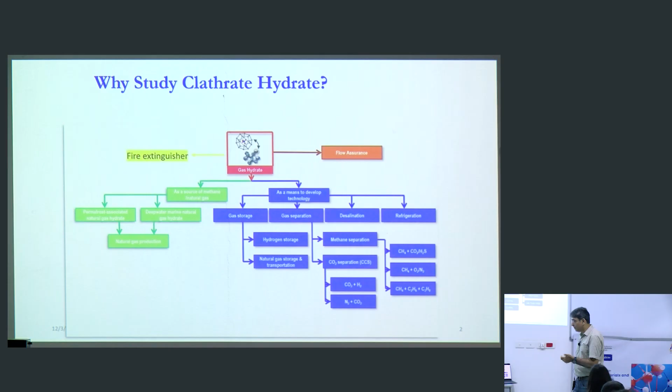Now, why does hydrate form? Why does ice form? When we have water molecules at room temperature, they have some thermal fluctuation. Each water molecule has thermal fluctuation. They try to form hydrogen bonding, but because of this fluctuation, the bonding does not form—one molecule is fluctuating here, another there, and they are not able to find the optimum distance where the attraction is large enough to form this bond. When does that happen? If I reduce the temperature, the thermal fluctuation comes down, and they find enough distance to start forming this bond—this happens roughly at 4 degrees centigrade. Then around 0 degrees, you see water crystallize into ice. This is what we know of water crystallizing into ice.

These hydrogen bonds form, and then we get a beautiful crystal coming out of it, and we see there is a phase separation. Solid gets separated out from liquid water, which will ultimately all get converted into solid ice if the temperature remains below 0. If the temperature is somewhere above 0, then an equilibrium will be attained, and all that we know about.

What happens when a gas is present there? Instead of reducing the temperature to minimize thermal fluctuation, if I pressurize a molecule with a gas like methane or carbon dioxide, there is not enough space for this molecule to fluctuate. So these thermal fluctuations are minimized, and when this gets minimized, this crystalline structure might form with the same hydrogen bonding even before 0, or at higher temperature than 0 degree centigrade.

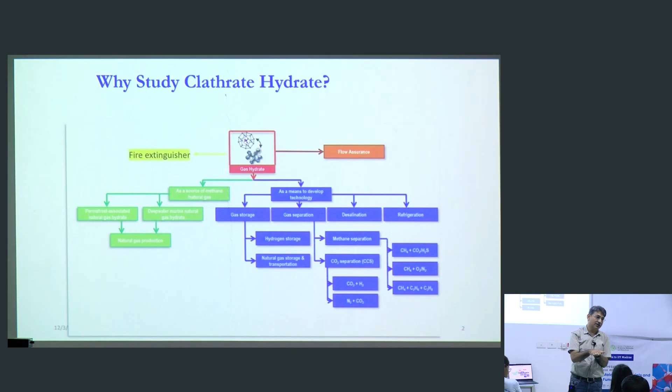So now you see, since this system had water and it had a gas, it started crystallizing out even at 5 degrees. It may even crystallize out at 10 degrees, and if it crystallizes out, then the flow gets obstructed.

Down that end, we have very high pressure. Up over here, we have low pressure. So we expect what the businesses would expect: maximum amount of oil should come out from this pipeline, that is how they will make more money. But if that pipeline starts shrinking, why will it shrink? Because the crystals are forming on the walls of the pipeline.

The metal wall is going to be slightly cooler compared to the liquid which is coming out. So where will it crystallize? It will crystallize at the temperature of the wall where it is slightly cooler, where the thermal fluctuation is minimum. So it will nucleate there, crystallize out, and slowly it will grow. If this is the pipeline, and it's growing, it will become like this. So your pipelines are becoming narrower and narrower, and then ultimately at some location it gets completely blocked, and it becomes a challenge.

What is the challenge it will become? I will show you if we have a marker here. Please understand, this is not going to be a straight pipeline. Let's say somewhere over here, this is the pool of oil we are talking about, and let's say this is the pipeline. I have drawn it poorly, but it's a nice pipeline, not larger, smaller diameter and all.

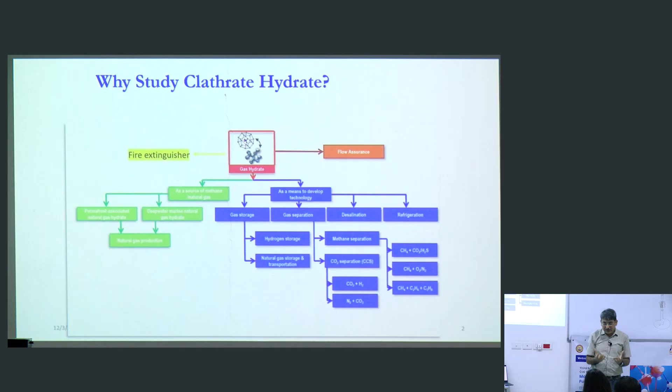You are looking into how the water molecules are interacting, how the gases are interacting with that, how the crystals will form, what kind of additives will enhance the rate of hydrate growth. For example, in gas separation, I want water to get converted into hydrate very fast, meaning I need an additive which enhances the rate of hydrate growth. Whereas in flow assurance, I need an additive which will inhibit the rate of hydrate growth. So two different applications need two different kinds of research, but the fundamentals remain the same: how hydrates grow, and what are the properties of hydrates. With this background, let me now go a little deep.

This was a broad understanding of why we do this. Once we know why we do this, then we'll go into how we do this. Let's take an example, but let's not go into this one yet. I'll come back to it. These slides will be there again. Don't worry, I'll go to the hydrate part first.

If I have to go for CO2 capture application, I did tell you about gas separation, giving you an example of a mixture of CO2 and nitrogen. When we talk about net zero, we talk about CO2 capture, utilization, sequestration. The first step is CO2 capture. What exactly is this? Technically, CO2 capture means separating carbon dioxide from other gases. Why do I need to separate it? I will discuss that later. It's there, I don't have much time, but I will discuss it quickly.

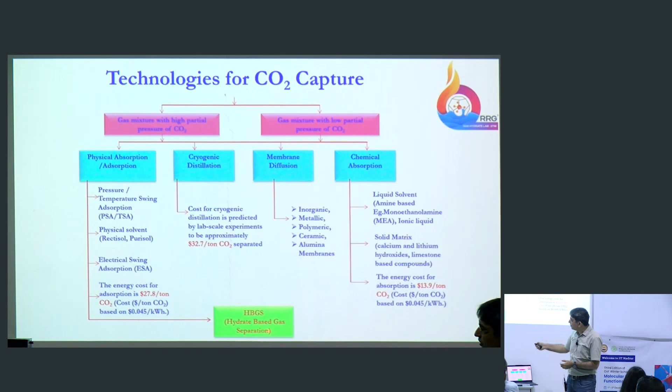The point I am trying to make is that depending upon the requirement, we may go for different kinds of CO2 capture processes. One could be a physical absorption process, one could be cryogenic distillation, could be membrane diffusion, could be chemical absorption. And if we talk about physical absorption processes, hydrate based gas separation process comes under that. I will try to give you a small understanding about what exactly this is all about.

These are hydrates. What are hydrates? As I was telling you, they're very similar to ice crystals. If you have ice crystals in one hand and a hydrate crystal in the other, physically there is no difference at all. You will not be able to separate or identify hydrate from ice. They look exactly the same because it's the same hydrogen bonded water molecule. And do you think gases are visible? Gases are not visible. So even if inside the cage there is a guest molecule like methane or carbon dioxide, you will not be able to see the difference. How would you determine which of these two are hydrates?

When you bring it closer to your ears, one of the hands will keep making a popping sound, because gas hydrates are not stable at room temperature and atmospheric pressure. These hydrates were synthesized at high pressure and low temperature. So once you bring the crystal out and hold it closer to your ears, you will see it continuously dissociates. You'll hear pop, pop sounds as methane or CO2 gas keeps coming out. If you put it in water, you will see all the gas come out as bubbles. This is how you differentiate them, but physically there is no difference unless you do a spectroscopic analysis. That's where the difference shows up, and we'll talk about that.

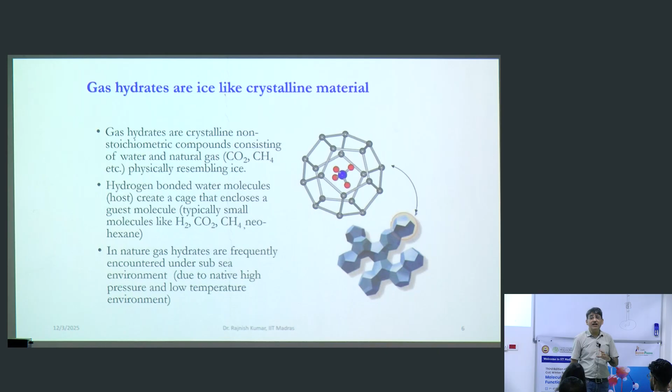We will talk about this in little detail, but gas hydrates are frequently encountered under the seabed, and they can also be synthesized in the lab. I can synthesize hydrates in the lab of multiple different structures. There are many structures, but we typically don't talk about all of them. We talk about a few structures which are available in nature, but in lab you can create many different kinds of structures.

But what exactly is this structure of hydrate all about, and why are we going to study this? Why as an engineer should I be bothered about it? Because as an engineer, I am supposed to find a solution to a problem which exists. The problem we talked about is a gas mixture coming out from the stack of a coal-fired power plant. Plenty of CO2, nitrogen, oxygen, SOx and NOx comes out from there and goes to the atmosphere. I don't want that carbon dioxide to go to the atmosphere. Why? We will talk about it later.

At this moment, we don't want this CO2 to go into the atmosphere. So what are we trying to propose? We are trying to propose that we will capture the CO2 apart from the other gases in this gas mixture. Nitrogen and oxygen we will release to the atmosphere because that does not bother us. The CO2 is bothering us, so we will capture it, we will store it, and we will see what we have to do with that. So this is one of the applications talked about here.

So what I am saying is, if I have a mixture of CO2 and hydrogen, or CO2 and nitrogen, I pass it into a reactor which is only having water, nothing else. If I have to otherwise capture CO2, I will have to have a zeolite, a metal organic framework, a covalent organic framework, some amine, some alcohol — something I will have to have. But all of these, please understand, has to be synthesized. Humans will have to synthesize it. In this particular case, I am saying we don't need to synthesize anything. We'll just use water.

I am coming there, that is where I will go. Don't worry. This is where I am different from others - I don't go to the depth first, I go to the shallow part and then we will go to the depth. I want you to first understand the application, remaining things we will talk about.

You see, too many calls nowadays. Okay, so very important point, and I want all of you to ask questions, because this kind of workshop or school is important to interact. I am not here to present and be done with that. Even if I will not finish everything, I will not mind, but whatever I finish, you should understand - that is the point I am trying to make. Very important point, but we will come to that. All of this is done, let us move to the next slide.

In this particular case, I just want you to understand this - this is a physical process. It basically means if I have a lesser amount of CO2 in my mixture, and if I have to get 100% CO2 or 99% CO2, I will have to do this step multiple times. It is not a chemical process. If it were a chemical process, what would happen? CO2 will react, will form something else, so there will be no CO2 left, I will get only pure nitrogen. I had warned you guys that this is a physical process, so it means I cannot talk about 100% purity.

Why do we do this? Let me explain - that is more important. We do this mainly because if I am using a chemical process, I will have to bring another chemical which will react with CO2 and form something. So we are talking about a reaction. What is the reaction we are talking about? Let us say carbon dioxide is A.

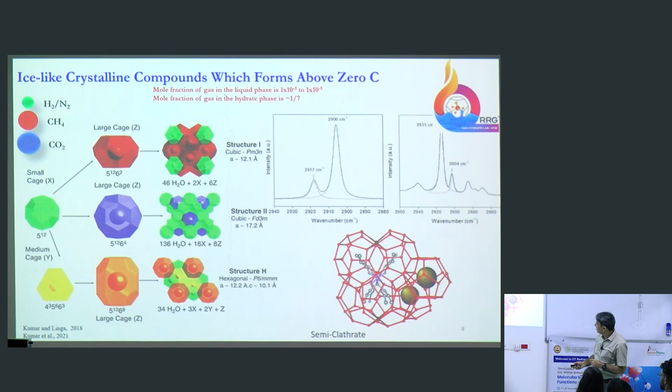So if I am somewhere in between, when I am forming hydrate, primarily CO2 will form the hydrate because it has lesser thermal fluctuation. It's all about the net energy, where it has to just go and sit there. If you have lot of energy, you will resist going in there, or even if you go in, you will come out. But if you have lesser energy, you will go in and not have enough energy to come out.

This is what we are trying to do. I have identified the right temperature and pressure conditions where I know CO2 will go into the cage, but nitrogen, even if it goes, it will come out. Okay, this is one factor, there are more. This is not that simple, so we will talk about it in the next slide.

What is shown here is that there are different kinds of hydrates which form, and it depends on the size of the guest molecule. For example, if I have one molecule of a certain size, and I know the hydrogen bond length stays the same at a certain temperature, how many molecules will be needed to wrap around it? Let's say 6 molecules would be needed. Now assume this molecule is a different size - do you think only 6 molecules will wrap around it? No, it basically means the cage size will depend on the size of the guest molecule.

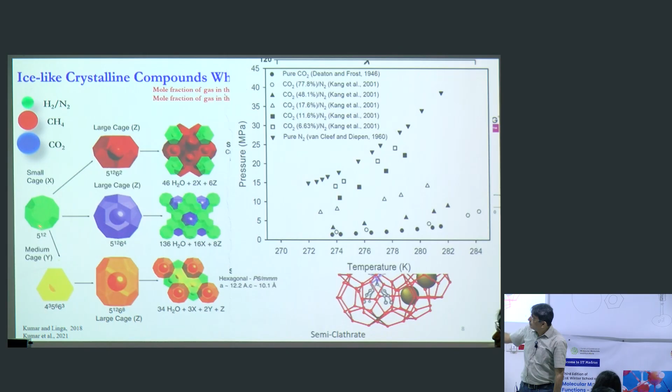The other details: in this unit cell, there are 46 water molecules, and 2x and 6z basically tells you there are 6 large cages and 2 small cages. So 46 water molecules form 6 large cages and 2 small cages - look at the ratio, 3 is to 1. Now if you look into structure 2, there are 136 water molecules with 16 small and 8 large cages. The ratio is 2 is to 1, small to large.

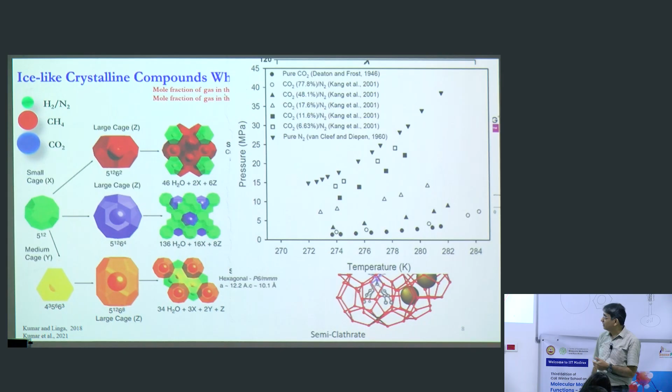So there are lot of details - not only temperature and pressure condition determine what structure forms, but also what kind of size and shape determines what structure forms. It is easier for a single guest, but with multiple guests it is a complex process - we will talk about it maybe in the next slide. Is that clear? Whatever little I was able to explain, I have explained, but if you want more details you can ask me and I will handle it.

Now if you look into having a mixture of carbon dioxide and nitrogen, CO2 is something like this compared to nitrogen, which is this small. Now I am forming a hydrate of CO2 and nitrogen. CO2 being larger in size will have to fit at least in the large cages of structure 1 hydrate, so typically methane and CO2 forms a structure 1 hydrate. It basically means the size of the guest is such that it can fit into the large cage of structure 1, and possibly it also fits into the small cages of structure 1.

When we form such hydrates and do spectroscopic analysis, we have seen, and this has been proven multiple times, that when a structure 1 hydrate forms with methane or CO2 - let's talk about methane first - all the large cages have one methane molecule in it, under typical temperature and pressure conditions of Earth. If we go to some other planet with gigapascal range pressures, more methane molecules can go into one cage, but we are not talking about that here. I don't want to go that deep, that will complicate things further.

At typical pressures we see on Earth, up to 100-200 bar, one methane molecule will be present in all the large cages of a structure 1 hydrate, and roughly 80% of small cages will have methane in it. Now, 80% means it is a function of temperature and pressure.

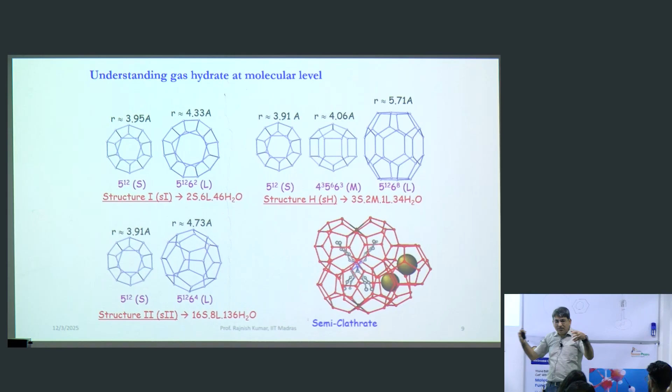It will not give you a stable hydrate. This is why a stable structure hydrate forms only when I have another guest molecule which can stabilize the small and medium cages. So two different types of molecules are needed for a structure H to form.

So when we did one such study, we saw that when we want to separate a mixture of carbon dioxide and methane... we didn't talk about CO2 and methane yet, we talked about CO2-nitrogen, CO2-hydrogen, which have two different sizes, easier. When I talk about CO2 and methane, which both form a structure 1 hydrate, how do I separate it?

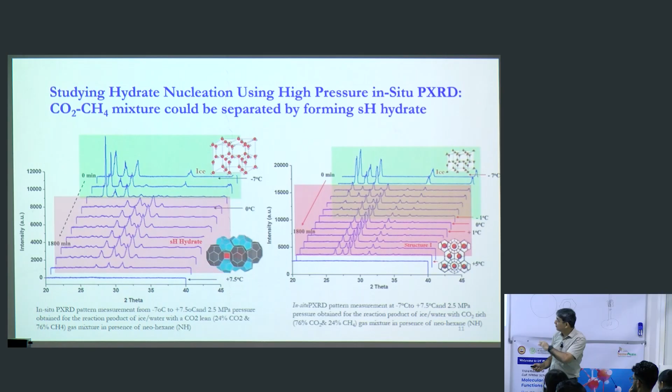It's complex. This is where you will have to go a little bit deeper. You have to analyze hydrates at different conditions and all. This is something which is already published, so I don't want to bother you guys with all of that. But this is only the thermodynamic part.

Now comes the kinetics. Why? Because a lot of CO2 will be coming out from any power plant. I need to have the rate at which it can be converted. So then we look into the kinetics of it.

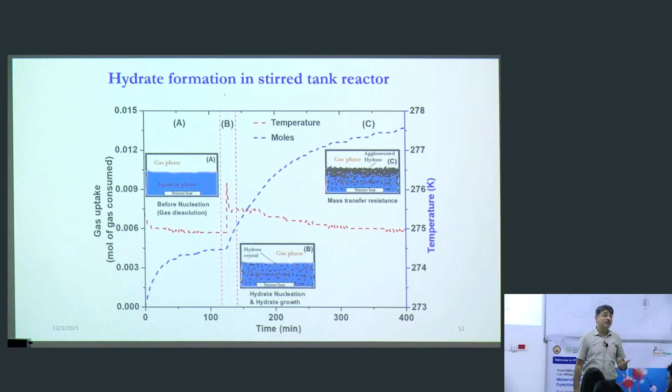So you see here there is a water column and there is a gas column, and the gas is CO2 and the water column is H2O. And when you do an experiment, you will see that sooner or later there will be a growth of hydrate and your reactor will be filled with ice-like crystals, which is actually not ice but hydrate, because your temperature is 1.5 degrees. At 1.5 degrees you cannot form ice.

If you look at this 1200 second mark, hardly 20% of water got converted into hydrate. I can do those calculations, how much water got converted into hydrate. If I do this, I will not be able to scale it up. I need it to be much faster. Instead of 1200 seconds for 20% conversion, I should achieve that in a second.

This is where we need to look at kinds of additives which will go in there, which will enhance the rate of hydrate growth. So those things we do, and you see in this particular case, this is the kind of hydrate we see, and it happens in a second. In a second you will see your entire water get converted into hydrate.

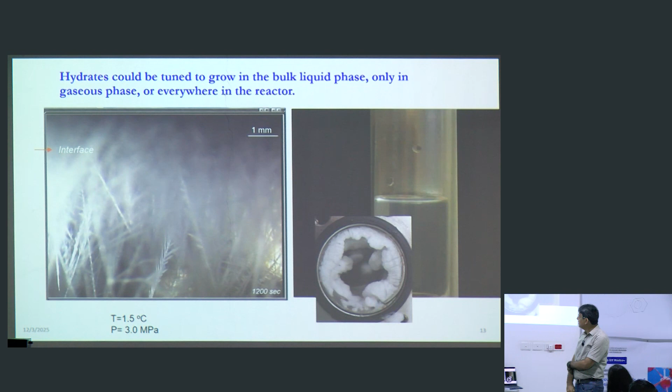By doing this, what have we been able to achieve? We are saying that if I can do this through a stirred tank reactor, this is the rate at which it is forming. If I can do it in some of my packing and so on, there are two things which come into picture: if water and gas have to be brought together, how do you bring these two together?

What is the solubility of methane or CO2 in water? Do any of you have any idea what is the typical solubility? 1 in 1000 maximum. At high pressure, 1 molecule of CO2 and 1000 molecules of water will be there, that is the solubility limit. When we talk about methane, 1 molecule of methane and 100,000 molecules of water. The solubility of methane is so poor.

So when we talk about CO2, now please imagine a scenario where I don't want to use any material, I will just convert water into hydrate and separate this gas. Easier said than done. Why? Because I have a liquid phase and I have to supply gas phase into this liquid phase. They don't mix with each other. How do I do it?

I'll have to stir, but stirring can happen at lab scale, 100 ml, 200 ml, 1 liter. If my reactor is 10,000 liters, how do I do stirring? Can I do stirring? Not possible for me to do stirring. It basically means the gas and liquid will not come together. Why does it have to come together? You see, the other thing which you missed here, which I probably didn't talk about, is this.

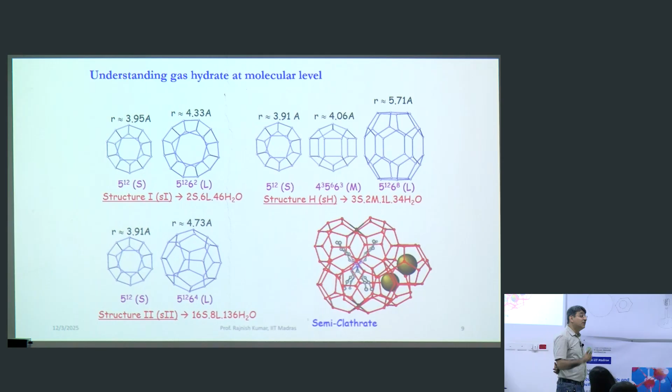If I am forming a hydrate of CO2, how many water molecules are there? 46 water molecules are there. And how many guest molecules are there? 6 molecules in the large cage and at least 1 molecule in the small cage, roughly 50% occupied. So what is the ratio? 45 by 7, or 46 by 7. What is the ratio we talk about here? Roughly 1 by 7 -- it basically means every 1 CO2 molecule is surrounded by 7 water molecules.

What are we trying to achieve here? The solubility of CO2 in water is such that even at very high pressure, for every 1 CO2 molecule there are 1000 water molecules. How much is needed? 7. So it basically means I have to increase the concentration of CO2 in this media 7 times, 10 times, 30 times. Only then will I be able to achieve the faster rate, otherwise it's not possible.

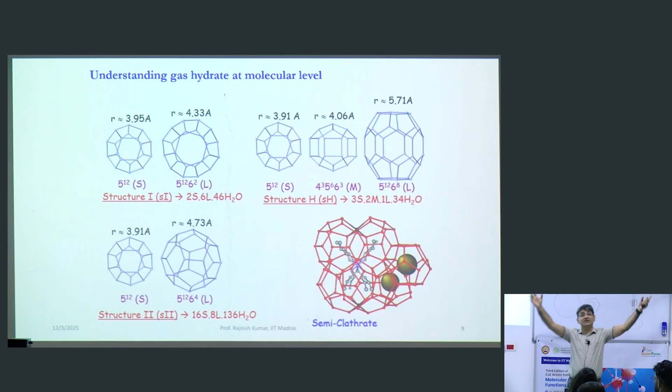If I imagine a reactor where gas is supplied via stirring, at some corner hydrates are growing. But what happens when hydrates grow? It requires CO2, no? What is the ratio of CO2 to water in the solution? Only 1 molecule of CO2 in 1000 molecules of water. So once the water molecules come together to encase this CO2 molecule, I need more CO2, then only the rate will increase. Otherwise how will it increase? The raw material itself is not there. This becomes a challenge.

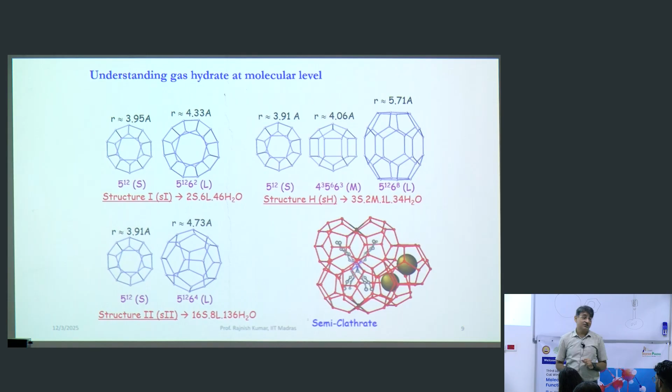This is why kinetics comes into the picture. How do you enhance the kinetics of these hydrates is the focus. So instead of doing a stirred tank reactor, I will distribute the water on a packing. Now, I also told you that hydrate growth is an exothermic phenomenon. It basically means if I don't remove the heat, temperature will go up. You saw the phase diagram - if temperature goes up, hydrate will not form. That also I don't want.

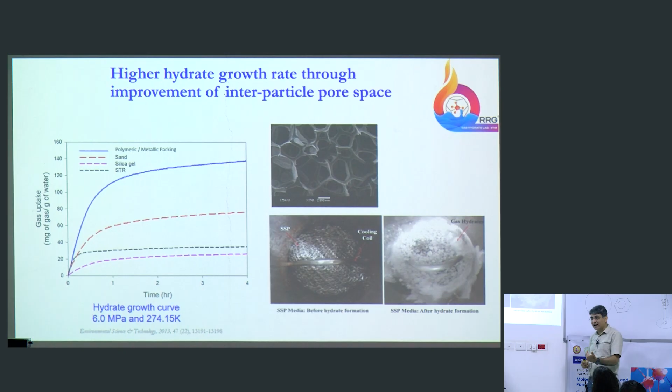So this is why I have to have a packing which will distribute the water, and the packing should have very high thermal conductivity. All of these things you don't look into from a chemistry point of view, because it is an application. You need to understand the requirement of the application to be able to talk about it - a lot of things go into it. So for packing I can use sand, I can use silica gel.

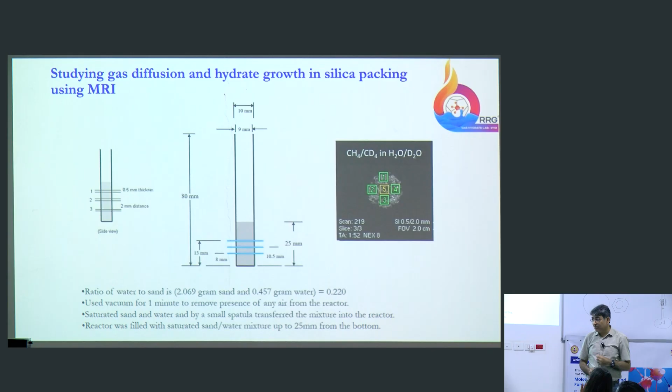Not much time is left, so I will go a little fast. We do a lot of these studies. How do I understand how hydrate will form? We can do MRI - we can understand where the CO2 molecules are going, how the water molecules are getting converted into hydrates. All of those things are there.

We can do a lot of MD simulation - what kind of additives would be needed for water molecules to come together faster, or for molecules to get encased, or for molecules that start dissociating to dissociate faster. For example, I'll give an example.

I have a large chunk of solid hydrate. Let's say I somehow ensure that hydrates start dissociating. So when hydrate starts dissociating, what happens? Temperature goes down. And the methane molecules - let's say it's methane hydrate - are still around that hydrate even after it has dissociated. So when they're still around and temperature goes down, it will reform.

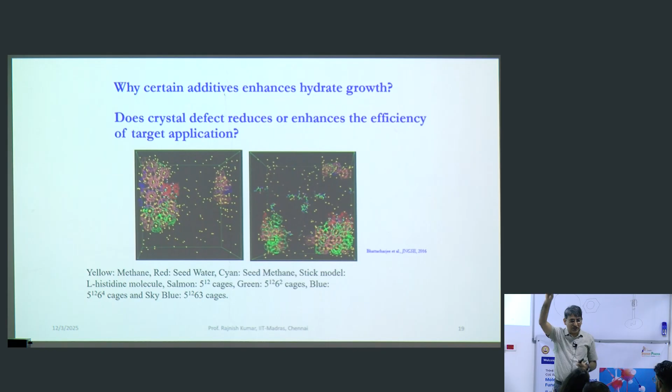What do I need? I need the CO2 or methane molecules to be pulled out from there as soon as it dissociates. How do I do that? You can have an additive which will preferentially interact with the methane molecule and pull it out from there. In a liquid solution, I put an additive which has preferential interaction with a hydrophobic molecule like methane. So as soon as it dissociates from the water hydrate - anyway it doesn't like water, it wants to be away - but there's no physical way for methane to go out. So I have an additive which will attract this methane molecule towards it, so it will come out.

Once it comes out, the next methane molecule will come out. If it does not come out, then this methane molecule will not come out either, because the chemical potential difference for the methane molecule depends on how many methane molecules are around it. If it sees no methane molecule on the other side, it would think, okay, let me jump out of it. But if there are methane molecules all around, it gets tricked into believing it should stay there - no point in moving to the other side. So this is how it basically works, and you need to worry about all of that.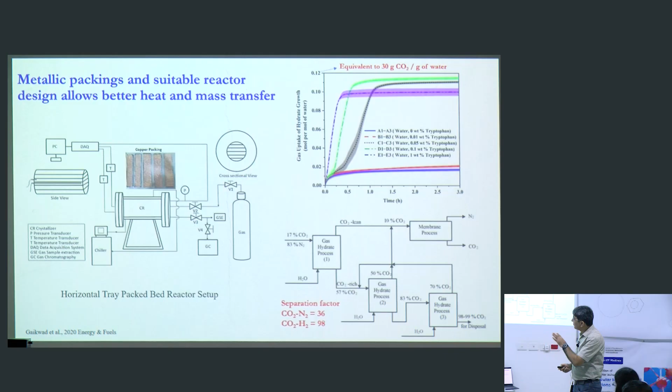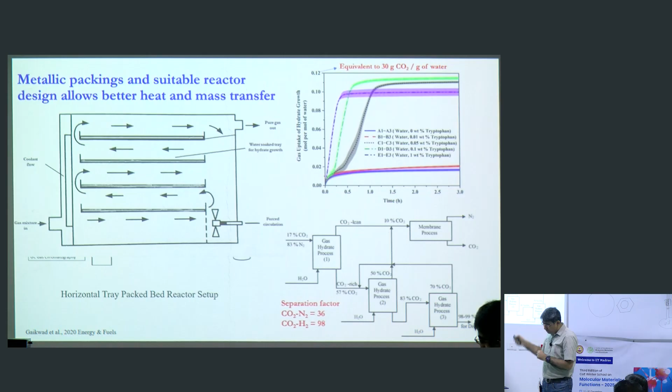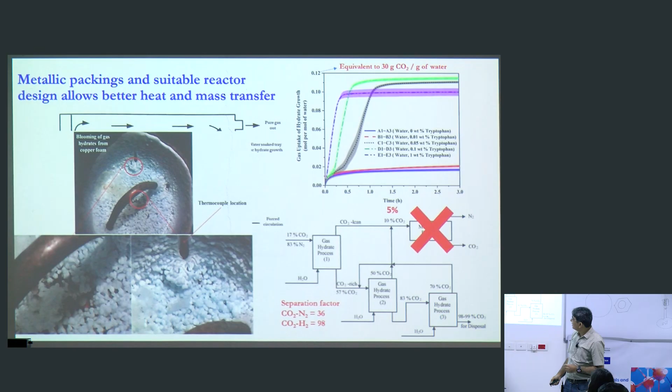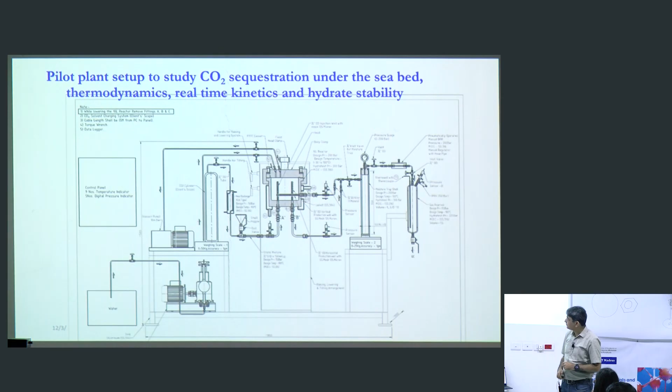Ultimately you can design a process based on this. This process was designed so that a gas mixture comes in, and by the time it goes out, it's not pure but 99%, 98%, or 95% pure - you should be able to get that. This is the kind of hydrate which grows, and ultimately you can scale it up. You can do these kinds of studies and arrive at a process for carbon dioxide capture. There are a lot of other details on CO2 sequestration.

I don't think we have time to discuss all of these.

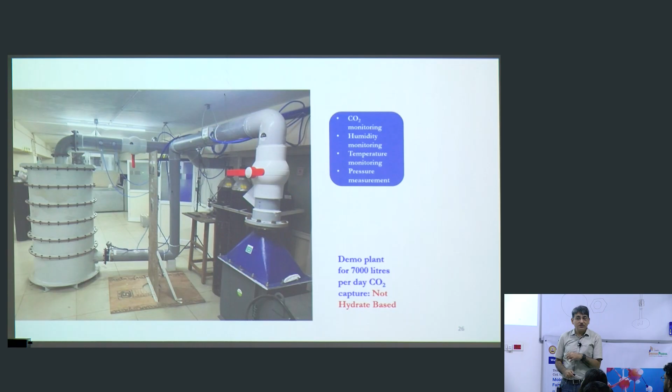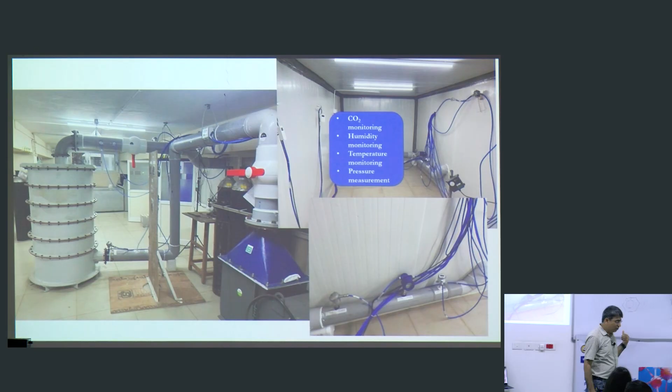We have many other processes which we develop in the lab. For example, this is one process which captures CO2 directly from the air. This is not hydrate based though, this is a chemical process, where you basically have a room supplied with a known concentration of CO2 24/7, and then you demonstrate how you capture the CO2 from this.

We develop larger scale pilot plants to basically separate carbon dioxide coming out from flue gas stacks, where there's 10% CO2, 90% nitrogen and all. So we ultimately start everything from the fundamentals. Slowly, one step at a time, you go to the larger scale. You develop this at lab scale, then you go to the larger scale and understand something over there. So all of these are step by step, but everything starts from the same chemistry.

If I don't have the right molecule, nothing of this will be possible. We do a lot of this.

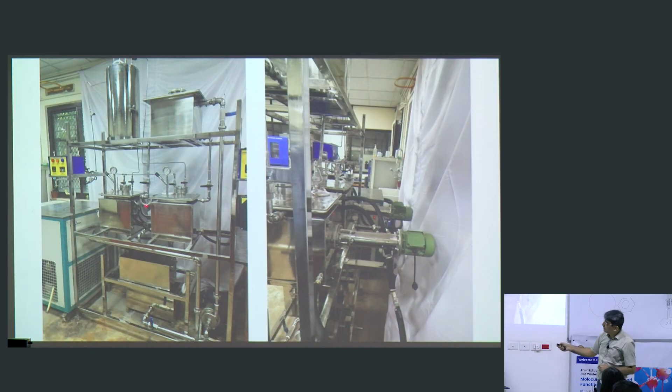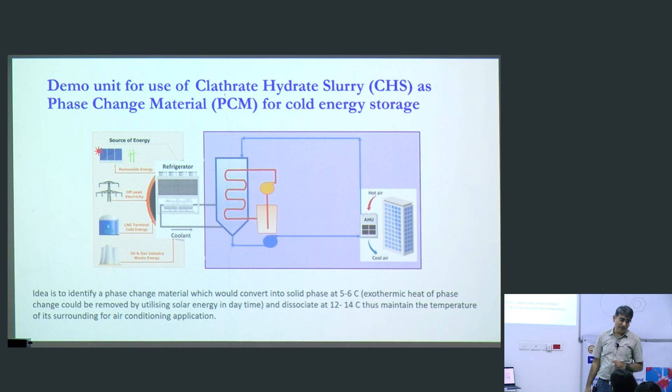There's also water purification, which we talked about. This is a water purification unit which we have delivered to one industry. The demo unit for the phase change material, we talked about the refrigeration process. We have demonstrated that unit also.

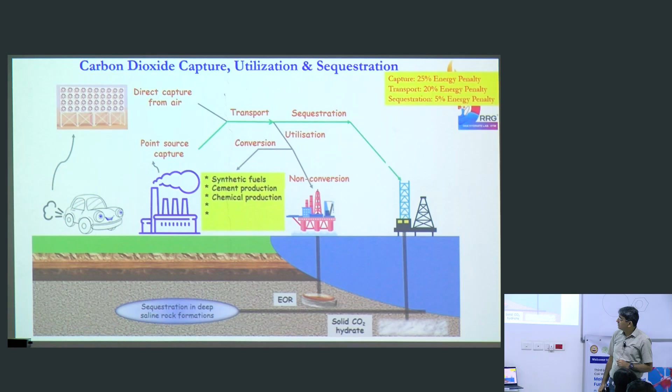So we move on to the last 5 minutes. I want to tell you guys about the challenge of kinetics, which I know people typically don't bother too much about in chemistry. We'll go to that particular slide, yes, this is the slide we are talking about. I know I'm a little clumsy here and there moving, but the point is I want to focus on things which are more important than just saying something.

When we talk about this kind of presentation, we don't really focus on this, but there are two types of research. Let me focus on this aspect. One is research done at a fundamental level, which potentially goes to a very high impact journal. But if you think that will allow you to translate it, that's fancy thinking. It's a very different kind of research that gets played in a different domain. The research that ultimately gets translated is a very different domain.

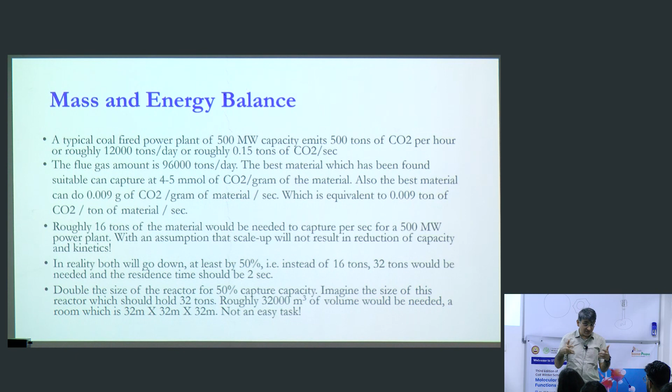When we do this kind of research that typically goes to publication, we don't really bother about the scale up, the kinetics of the process. We focus mostly on the thermodynamics and the science behind it. We develop the material, but when this material has to go for actual application, there is a big gap.

That gap, you can't necessarily fill right away. But I want you guys to always think in that way, because ultimately whatever you are developing has to go for some application. If that application is not possible, you may develop a lot of processes, it will get published, I'm telling you, Angewandte Chemie and JACS and all will come out. But if you really want it to be applied in reality, then you have to always think about the scale.

And this is the point I was trying to make all this while about kinetics. This is something chemistry students should never forget, the scale, because you don't talk about the scale.

Now let me tell you about carbon dioxide capture. I'm sure all of you would have heard about carbon dioxide capture, net zero, many of you would have heard about. Today I'm not giving a net zero talk, but typically we know that one of the ways to achieve net zero is by capturing carbon dioxide, utilizing it, or sequestering it.

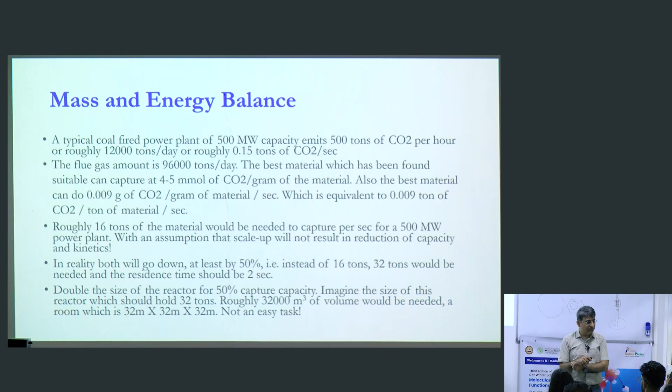A lot of research is happening. Anyone you ask, many faculties in chemistry department or anywhere, they'll say, I work on carbon dioxide capture. Good, what do you do? I work on a metal organic framework, I capture the material. Very good. But then think a little bit beyond that, and this is what I want to focus on in the next few minutes. Why do we need to, when we say we are working on CO2 capture, where will it go?

It will have to capture CO2 from a power plant, where coal is burnt every second to produce electricity. So shouldn't we look at it from that side and reverse engineer to see what do I need to do? Let's look at it from the other side, not from the side of working on CO2 capture material. Let's look at what is needed. Once we know what is needed, I'll be able to tweak our process so that I ensure I deliver what is needed.

A typical electricity generation unit, a coal fired power plant, is 500 megawatt units. Does anyone here come from a power plant region, where there are coal fired power plants? NTPC, which NTPC? Let's say Ghaziabad or some place. Singrauli, okay, you come from that location, I come from that location, this is what I'm saying.

Near Singrauli there is a place called Vindhyanagar, where there is a power plant called Vindhyachal Super Thermal Power Plant, VSTPP. This unit is the largest power producing unit in this country, producing roughly 3000 megawatts of electricity, which means they have roughly 6 such 500 megawatt units.

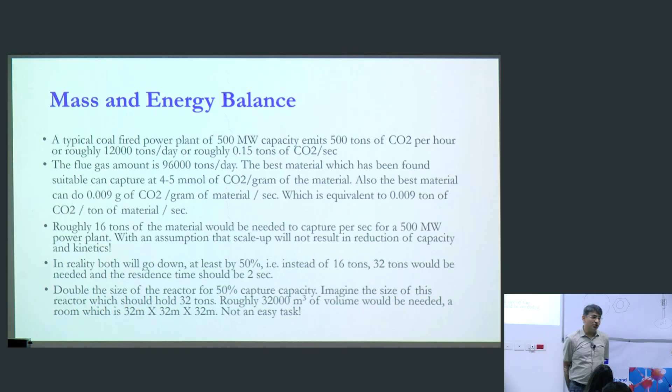This is real data which I have given you. I am going to capture CO2 from this, this is the real requirement. If I am developing something, it should apply here, regardless of whatever else I'm doing. So now let's look into the information.

This is the CO2 content. The flue gas is roughly 10 to 15% CO2, the remaining is nitrogen and oxygen. So what is the flow of the flue gas? 96,000 tons per day, from one of the 6 units in this power plant. Now you see, 96,000 tons per day of flue gas has to be treated. If I am talking about CO2 capture, this is my challenge, 96,000 tons per day of flue gas from one unit has to be treated.

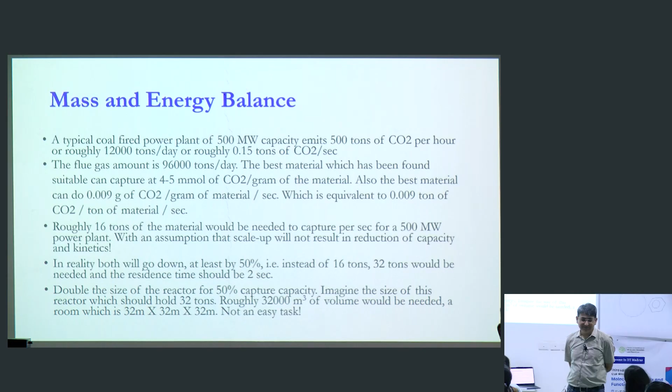Now let's go a little deeper. The best material found suitable captures 4 to 5 millimoles of carbon dioxide per gram of material. As soon as you come to the lab, it comes into millimoles. 4 to 5 millimoles of carbon dioxide can be captured in 1 gram of material. But that is not sufficient for me, because I need the second data.

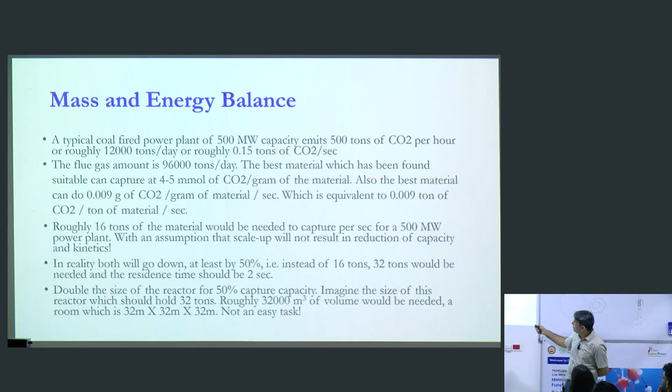As you see, the first thing I mentioned was per second. If there is no time data in your data, how do I use it? You might say you'll capture 4 to 5 millimoles of carbon dioxide per gram, but you may do it in a day, an hour, or a second. How do I know what you have done? This is why, whenever you generate this data, please generate it with time.

So now, the best material -- we dig deeper into the literature and find better data which says 0.2 millimoles of CO2 per gram of material per second. So I convert 0.2 millimoles into grams. 44 is the molecular weight, so 0.2 into 44 becomes 0.0088, which I wrote as 0.009.

So now my problem is a little simpler. I know the capacity per second: 0.009 grams of CO2 per gram of material per second. But this is too small, how much do I need? I need it in tons. So I'll have to convert this gram into tons, both here and here. So whatever unit I put, it doesn't matter as long as both are tons, and I leave the second as second. Simple, everyone understands it.

So now my problem is that I need to do this: I know my capacity of material is 0.009 tons of CO2 per ton of material per second. Now the question is, how much gas do I have? 0.15 tons per second. So I do the math, and I see roughly 16 tons of material will be needed to capture the CO2 coming out every second from this plant.

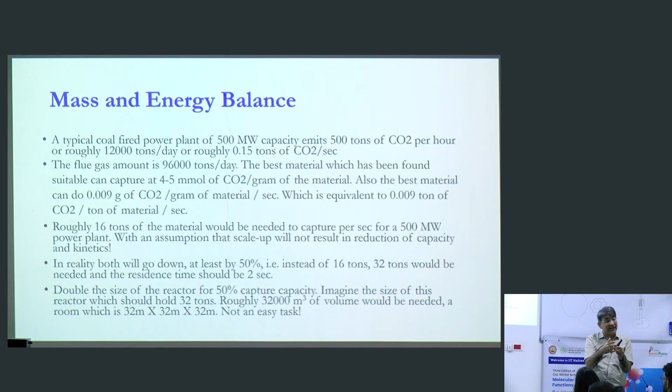How much do I need? 16 tons. But I made a mistake. What mistake did I make? See, when you do an experiment in the lab which is in milligrams, micrograms, every molecule will see a carbon dioxide molecule, so the kinetics will be fast, thermodynamic capacity will also be better. But when I convert that gram into ton, it will not be the same.

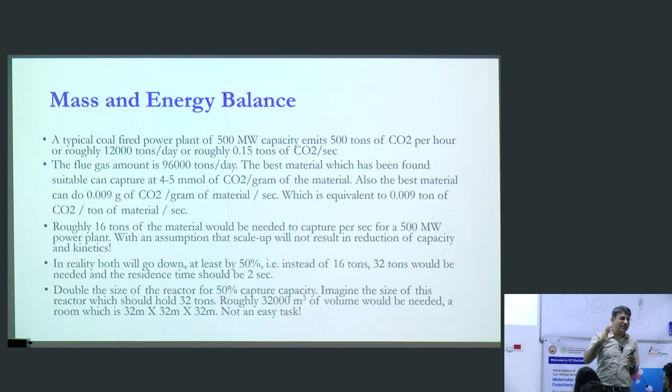Instead of powder, I will have to pelletize it. In the depth of the pellet, I will not see any CO2 molecule going through. Typically, the thumb rule says that if you scale it up at that large scale, the kinetics drop will be 10 times, thermodynamic drop will be 10 times. I am not assuming 10 times, let's say only half. What does that mean now? That means if my kinetics and thermodynamics go half, instead of 16 tons of material, I would need 32 tons of material, and instead of 1 second, it will do it in 2 seconds.

Simple, easy. I am trying to make it so simple that everyone understands it. So now what is my challenge? My challenge is that I will have to have 32 tons of this material to capture this material. Now, if I have 32 tons, I will have to pack it in some reactor. 32 tons of material has to be packed.

So 32 tons of material, let's assume the density is similar to water, 1 gram is 1 centimeter cube. So how much will that be? 32 meters by 32 meters by 32 meters. Yes, I know that, I am seeing that. So 32 meters by 32 meters by 32 meters. Now I need a reactor which is 32 meters long, 32 meters wide, that I am able to manage.

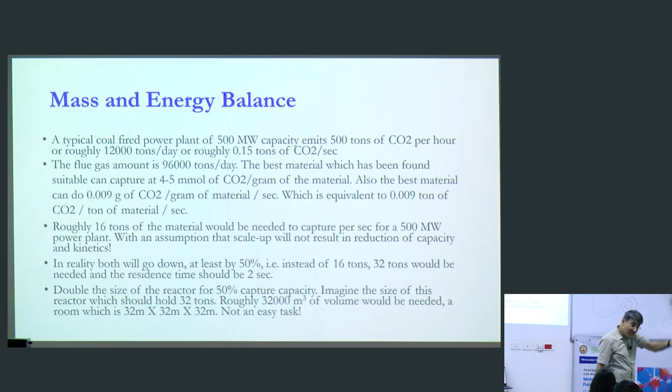How will you manage a 32 meter height reactor? It basically means I will have to break that 32 meter height into probably 3200 small units. So you imagine the scale.

Now this is only half the story. Why? Because I needed 1 second of residence time. Here it is doing it in 2 seconds. This basically means I will capture only 50% of my material. The remaining 50% will come out without being captured. So to capture 50% of my material...

I'll have to do this. How will you pack it? You understand the challenge? You have designed the material, you have done it, and so what is needed?

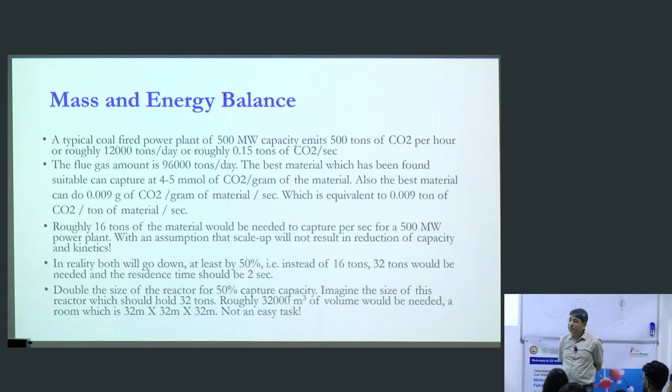Now there are many other problems which I have not even talked about. For example, this 32 tons of material which you have created - what I am doing is capturing carbon dioxide, but this 32 tons of material has been created too. When you create some material, how much CO2 will you emit? You will use the same energy to create that material, so that also gets added there.

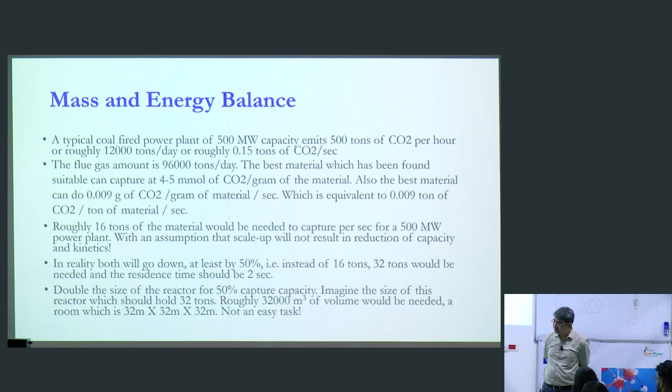And you will have to regenerate it, because every second you cannot create 32 tons. So you will have to regenerate it. Regenerate basically means you need another unit of 32 tons next to it. So while this one is capturing, this one is getting regenerated, and when this gets regenerated, this will capture and that will get regenerated. Only then will you make it continuous - otherwise how will you make it continuous?

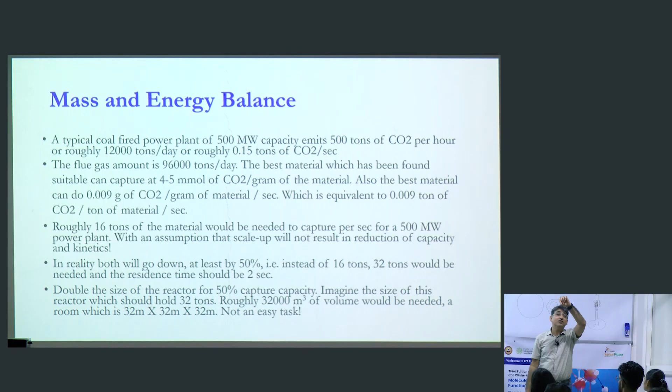See the challenge. So if you don't look at it from the user's point of view, your science will not really make a difference. This is why you see I went in the wrong direction - instead of starting from fundamentals, I went from the application. This is why I always go to application first. You have to first understand where, whatever I am doing, it will be utilized. That's the first question you should be asking.

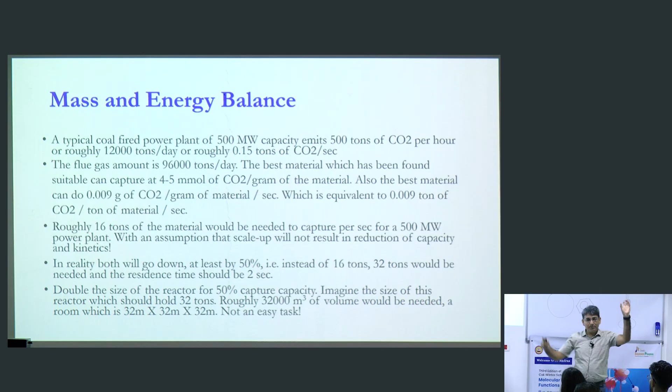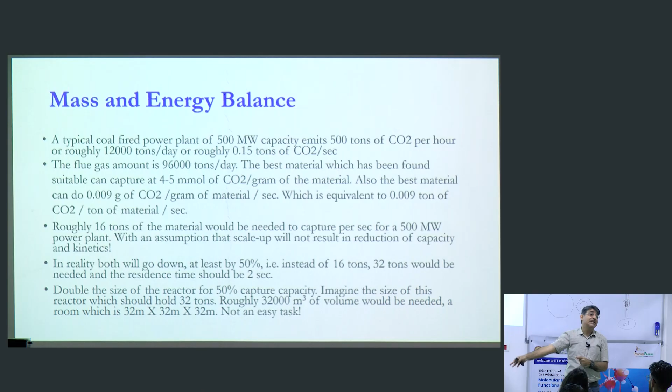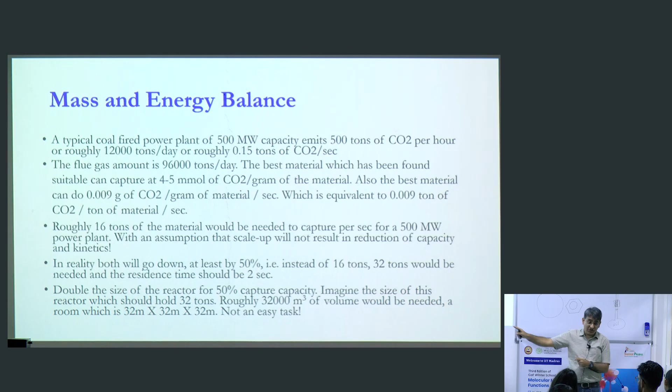Because if you are not thinking there, you can do hundreds of new discoveries, but that will never get applied. And you will always be told that you people are academic people, you only do things for papers. Whatever you do does not get applied in reality, because you have to start thinking from their side. If you don't start thinking from their side, then whatever you do, you might fail. In this classic case, it will be difficult.